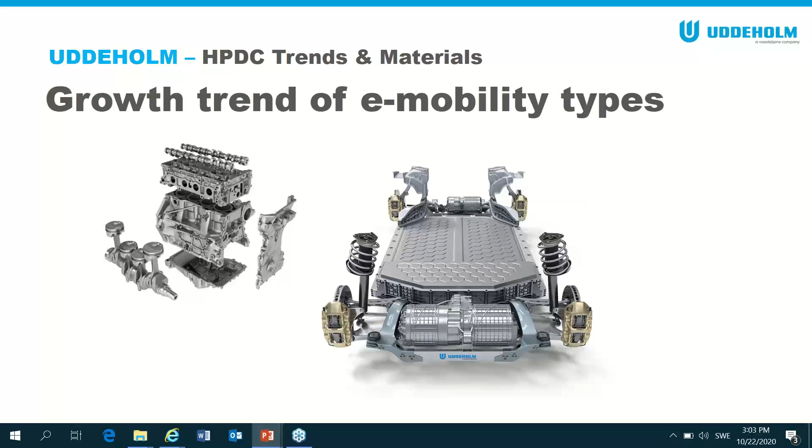So if we look at the chart in front of us, you may have seen something similar. This is our chart, but the information comes from a major OEM of vehicle manufacturing in the world, the top four. And they predict that by 2050, about 45% of all vehicles will be hybrids, and about 40% will be pure electric EV. And the rest will be made up of fuel cell, depending on how big that gets.

But you might notice that the internal combustion engine drops rather rapidly until it completely disappears. But it only disappears as the only form of propulsion of the car. The actual internal combustion engine will continue in the hybrid until eventually hybrids are discontinued as well, and we have a completely electric fleet.

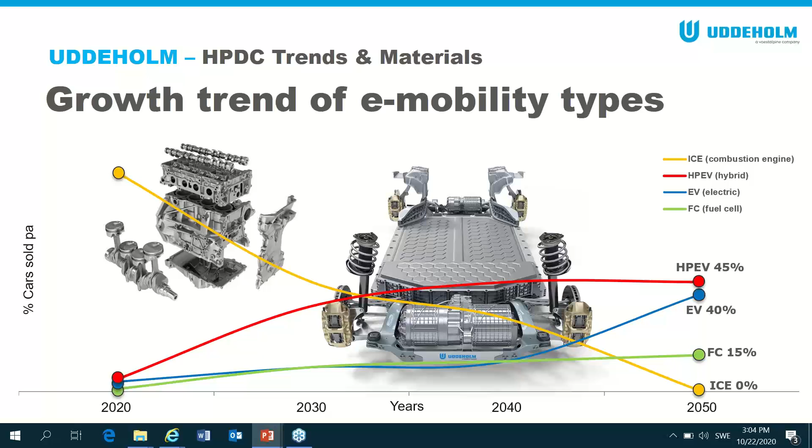But this is really, really good for die casters, for tool makers, for automotive companies in general, because the EV fleet has to now be built up from almost nothing in many countries. It's still a very low, single-digit percentage of cars sold, and the hybrid fleet is growing. So, of course, in the next 20 years, most consumers are going to be under pressure to replace those cars. The sales will inevitably go up. They have to, because laws will be passed on old polluting vehicles. And the benefit for casters and tool makers and tool steel companies like ourselves is our parts are going to go up in casting, not go down.

So that's the benefit of EV and hybrid. So for instance, in an electric vehicle, you will still have structural parts. You will have this in hybrid as well. You're obviously going to have battery packs in both vehicles again, and you're also going to have electric motors in both vehicles. So in a pure EV, you'll probably have 2 motors. You could even end up having 4 motors if each wheel was driven in the future. And all of those will be cast, so it's really, really good news for us.

And if we just look at structural parts, one of the major US manufacturers that I visited a few years ago told me that they think about 30 to 40% growth is possible just in structural tooling on their vehicles. And if you put that into context, I'm very lucky in my job, I get to travel a lot. I visited Ingolstadt last year in Germany to see Audi's R&D center, and they told me there that they think that the average Audi platform will be about 20% high-pressure die-cast structural panels.

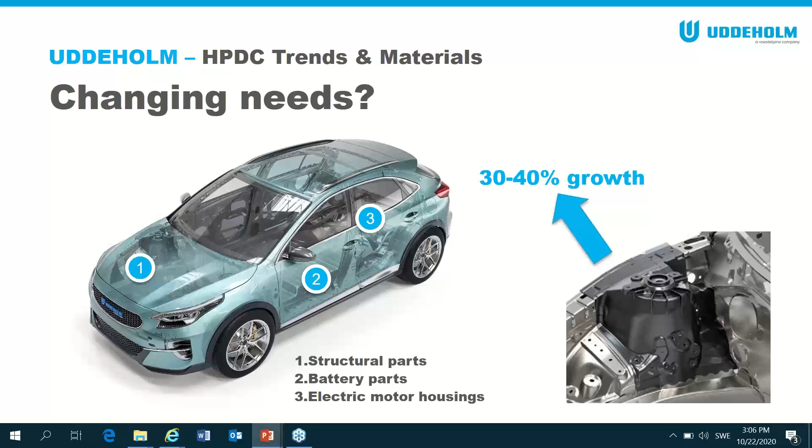And that's just an average. They can go up, they can go down, but you can see this is spreading everywhere. It's even going to filter its way down to small vehicles in the future, so structural is definitely here to stay. If we look at this chart here, so that's structural, let's just talk about batteries for a second. So batteries are interesting as well.

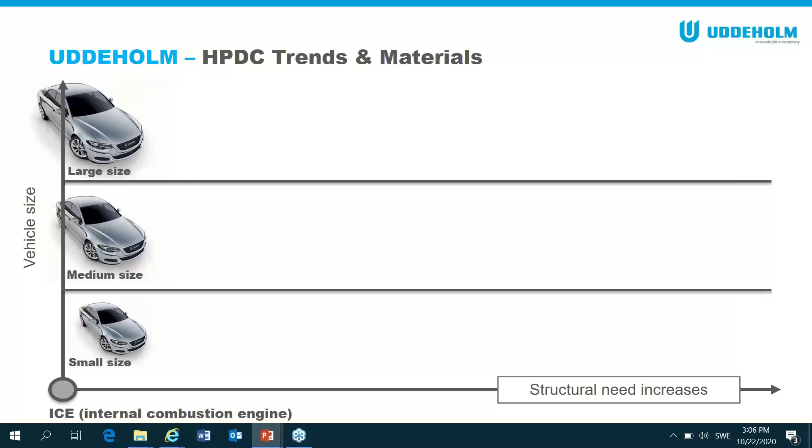If you look at the chart, the horizontal going across is the structural need increasing, and the vertical is the size of the car. And then you obviously have, that's important for weight saving. So that's a point when weight saving becomes important. When you cross that, you need to think about maybe more batteries, lighting in the car and so on.

So if you place the first generation Toyota Prius there, that was a HEV, which is a hybrid electric vehicle. So these cars just need very small electric motors in comparison to today, and quite small battery packs. The battery packs were not structural. They often just had a very limited range, so they weren't even that big. So there, the demands on the tool steel and the casting are actually quite low in comparison to where we are today. But today's a different story.

So if we look at the hybrids, the plug-in hybrids you can get today, they're getting quite complex, very sophisticated cars, very desirable, in fact, with good ranges. So it's getting better and better every year. And in these cars, the battery packs now are reasonably quite large. BMW, Audi, they all do pretty decent sized battery packs on their plug-in hybrids.

And some of the battery packs are load bearing. Some of them need to be sealed in a crash, so they have to have some strength in them so that they don't split when the batteries run the risk, I guess, of catching fire in an accident. So there are restrictions there on the casting, which of course pushes up demand on the tool steel and in the tooling.

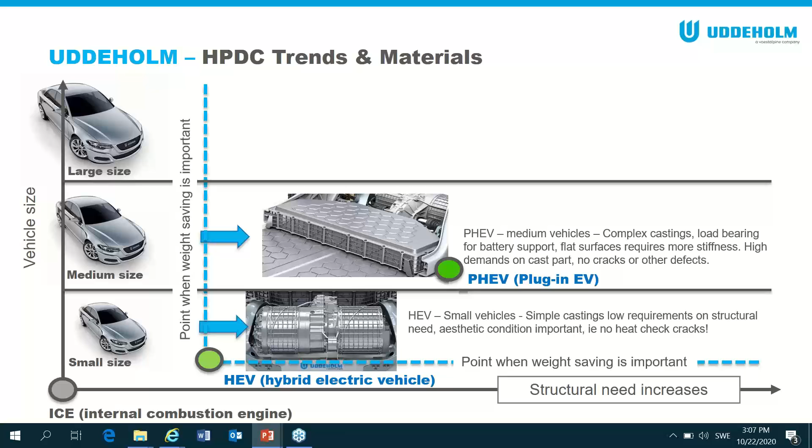And finally, if we go to the biggest electric vehicles that you can get, in the future, this is another trend, and this is where steels like Dievar were developed to where they are today. So battery packs become part of the structure, just like structural tools themselves. So if you took the Porsche Taycan, for example, a big car that I particularly like, I can't afford it, but I like it. The floor pan is actually part of the structure of the car. So the battery pack itself has to have some crash properties, just like a structural panel.

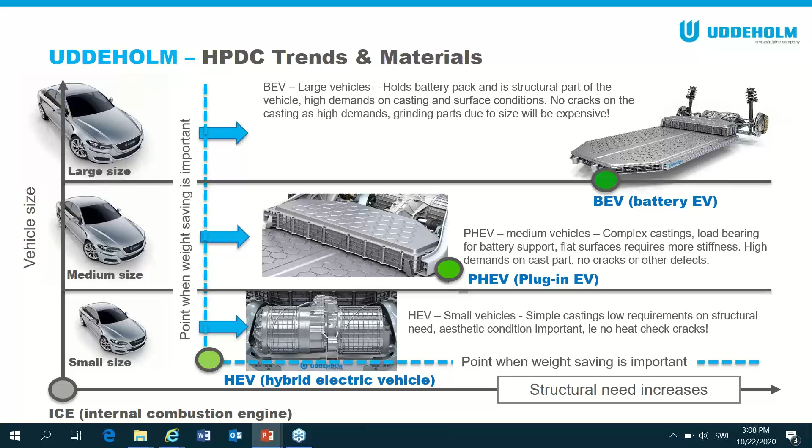So for instance, heat check marks on the critical surfaces wouldn't be allowed. So if you're going to have that, then you obviously need to have a tool steel that can cope with thermal fatigue and delay it as much as possible. And all of this technology is just going to filter its way down through to all the vehicles.

Now, if we go back to where we are today with the internal combustion engine, as I said previously, I'm quite lucky. I get to travel a lot for my job in a normal year before coronavirus. On average, I do anything from 130 to 150 casting visits in a year. That's to everyone from OEMs all the way through to tool makers, the whole process chain. And this is just a snapshot of what I've gleaned over those years of what certain customers tell me.

It's an average of what certain customers get. So if we assume that a clutch cover is being made, they come in all different shapes and sizes, so this is very general. But let's say a clutch cover is made on a 2,000 ton press or less. Then what we're saying here is I've seen customers that claim using H13, H11, 44, 46 Rockwell, around about there, they get anything from 80,000 shots to 150,000 shots.

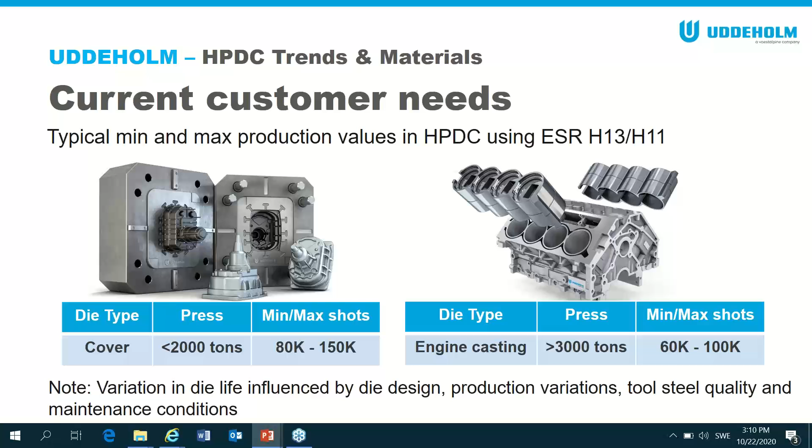And that variation comes down to several points. It's influence of the die design, the production variations, which are a pretty significant role here, the tool steel quality, which of course plays a big part, and also maintenance conditions of the tool, so how it's maintained and so on. And you're going to see that repeated a bit further on.

If we look at structural parts, and how do structural parts compare to that traditional clutch cover engine, internal combustion engine parts, they're actually quite bad. If you look here, the picture on the left is a longitudinal bridge structure, which I saw in Europe. And you can see the heat checking here is pretty bad. This is the thermal fatigue damage that you see on these types of parts. This manufacturer is very good. They have excellent process control, some of the best I've seen in the world. And even they have problems.

So this is an H11 type tool steel. It's 44 Rockwell, plus or minus 1. And you can see 30,000 shots just over. And the part itself has got heavy heat check damage on it as well. And that has to be ground out, actually. So in this manufacturer, they don't actually repair the die. They actually grind the part itself.

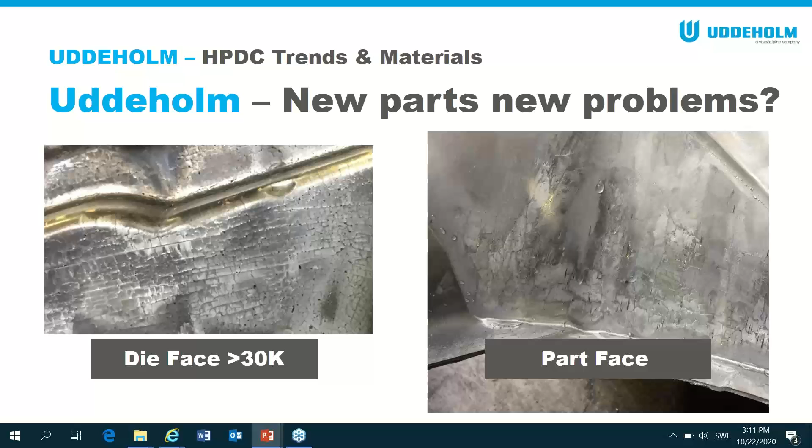And a typical production on the longitudinal bridge for this manufacturer could be anything up to 100,000 parts. But they start having to regrind it from quite early on. So maybe you see here 30, 40,000 parts and they're having to regrind. And it's the same with shock towers as well, just different levels.

So if we look at shock towers, I've seen quite a few of these now in my trips globally. And if you think about a shock tower in itself, they're all different shapes and sizes, but they're quite complex panels. They're quite thick and quite thin in certain areas. Heat checking seems to be the main failure again with these, and it seems to come quite quick on some of them.

And the die life there is just like with all the other stuff, depending on which manufacturer you're at. So again, I visited some customers that run shock towers and they can't even get 30,000 shots. In fact, they really struggle. I visited others where I'd probably say a medium average life is about 60 to 70,000 before major issues.

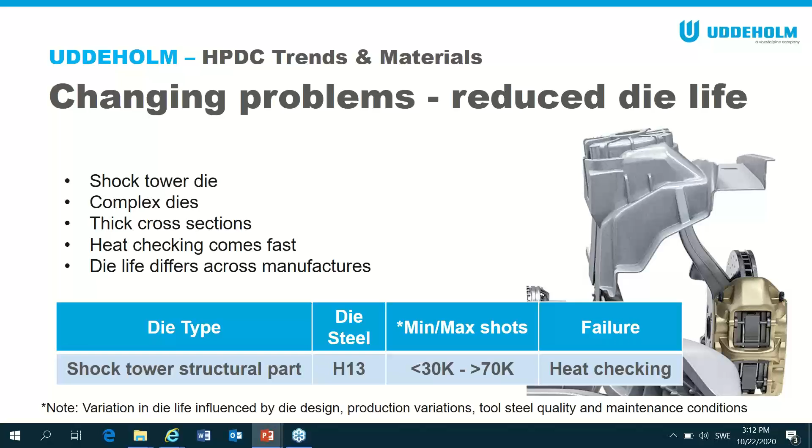There's one market which stands out globally, and that's Germany here. Germany has some of the best die life I've seen when it comes to high pressure die casting. They use an H11 type normally. But again, they're having to regrind the panels quite early on. So the total die life is probably quite good, but there's a constant reworking of the panels, which is of course very expensive. And interestingly, that tends to start around the 40, 50, 60,000 shot area, depending on how bad it is.

So we've seen the trends and an indication of the type of challenges that you're going to face in these certain parts. So let's just look a little bit at typical die failure. There are 4 that I'm going to talk about today. There are obviously a lot more than 4 failures, but these are the main ones you come across. There's corrosion, cavitation, and turbulence, but we won't cover those today. So soldering is a common problem. We work from the top down. Soldering is obviously where the aluminium wants to stick to the core pin.

And this is normally, you find this in areas where the die is getting extremely hot and conformal cooling isn't used or can't be used or isn't used at present. Then we come to the big one, so that's heat checking, thermal fatigue. Thermal fatigue is a cyclic problem. It's basically the extremes of the heat in the process and the coldest part and the gap in between the two. It's called the delta T, and that needs to be as close as possible to delay heat checking for as long as possible. And that's hard to do, and we'll go into that a little bit now.

And then we have gross cracking. Gross cracking, of course, is a failure that everybody wants to avoid. No one wants a broken die. Unfortunately, I've seen several in my travels. It is still quite rare, but it does happen often enough to be a concern for most people. And gross cracking really is where you've overloaded the tool. It can be either process related or it can be mechanically related to something that's gone on in the process itself, press misalignment, and so on, sharp radiuses.

And then we move on to erosion. So erosion is a hot wear, mechanical wear. It can also be chemical as well. It can be the type of aluminium that you're running, if it's high silicon. The velocity of the melt has a lot to do with this, how fast your aluminium is coming into the die. And really coatings or surface treatments are the long-term answer. And we've got some great examples to show you.

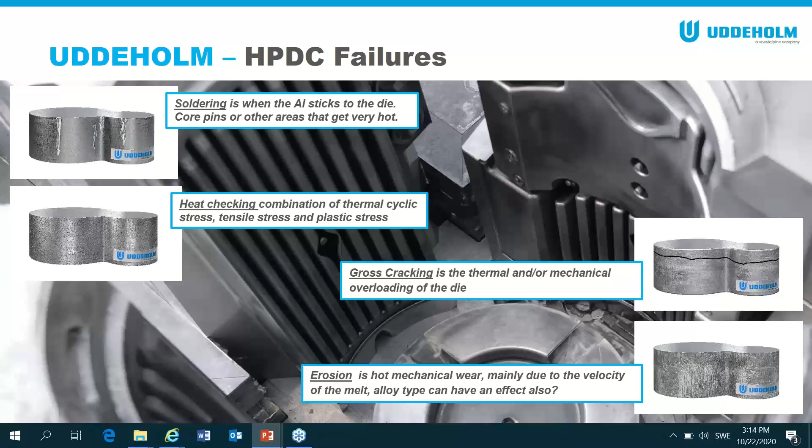So very quickly, just one page, we're going to cover each failure because we haven't got time to go into details. We could talk 2 hours, 4 hours about heat checking, for example. So heat checking, we'll just talk about how to avoid heat checking. What do you do to avoid it? As I said before, it's all about controlling the delta T, which is this variation in temperature from the highest to the lowest. That's the critical thing that you need to control. And you can go about that by various different things.

So the injection speeds is one. So try to avoid excessive injection speeds, and I'll give you a rough rule of thumb in a second when we talk about erosion. Try to avoid excessive spraying. That kills dies, absolutely kills dies. I think at Euroguss a few years ago, a company called IV4 did a talk. They submitted a paper about spraying, and they said, I think it was something like 90% of all failure is down to spraying. It was quite critical, but spraying has a big influence, absolutely. Then think about the design, think about the heat treatment, and of course the maintenance. There's so many things that can influence heat checking.

The tool steel, so if you look at demands from the material, which is what I'm here to talk to you about today, from a material point of view, we have to give the customer a material which has excellent hot strength, it has to have high ductility and toughness, and it has to have high creep strength. And what's interesting is if you don't have any of those three properties, then you're not going to have the performance in the material that you need. And if you look at the picture, you can see that's the same die that we saw before with quite excessive heat checking. And you can see there's actually breakout on some of the surfaces there of the tool steel.

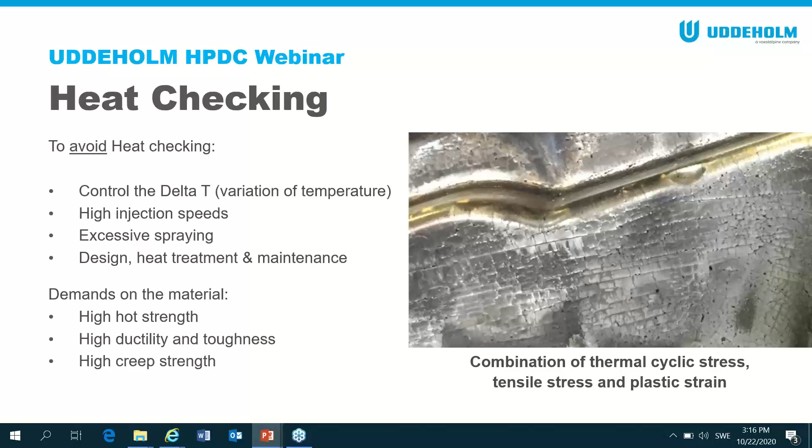You also have to think about preheating. It might interest you to know that if you preheat even an H13 type material, you can double, triple the toughness in it in production. So preheating is pretty significant. And Dievar is much, much tougher than an H13. So you can see why Dievar is so popular. Again, control your cooling. If your cooling's all over the place, then you're going to reduce the toughness because it gets cooler, like I just explained with the preheating.

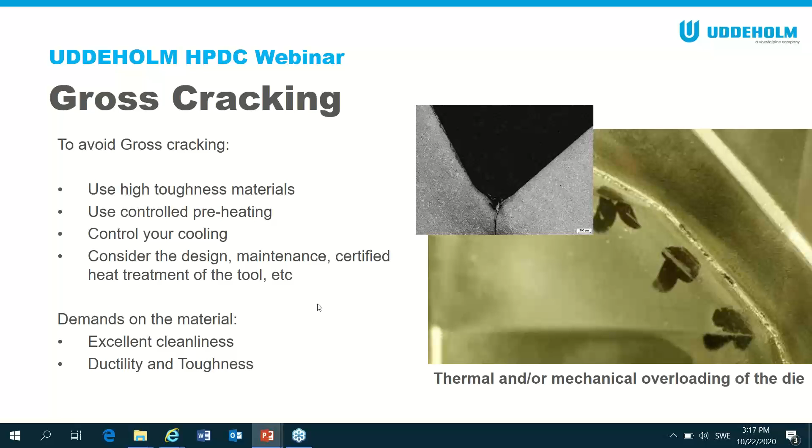If the design says that you have to have this and you have good process control and everything else is really good and you just narrow it down to the tool steel's abilities to have good toughness, then we can recommend something like Dievar, which is exactly what we did with this customer after they had this problem. So that's what we need from our material. Material demands there on the bottom left, excellent cleanliness. Dievar, for instance, is 100% pressurized ESR. We only use the latest furnaces now to make Dievar, and good toughness and ductility.

So you have to consider the design when erosion is present, of course. If you've got a very, very thin gate with a lot of velocity coming through it, then you're definitely going to get washout erosion damage. So you have to consider the velocity and how much damage that's going to do. We tend to say if it's a non-vacuum assist die, 30 to 50 meters per second, that rough area. And if it's a vacuum die, then maybe 15 to 30 meters per second. Those are rough rules of thumb. It goes up and down, and different manufacturers have their own standards, but that tends to be what we say works quite well. You really, however, have to use a surface treatment here.

And of course, the aluminum matters as well. It's high silicon, and that's obviously going to affect what's going on there with the washout. So you have to protect the tool steel with a coating or a surface treatment. So here you've got the choice of nitriding or obviously Eifeler do a very good coating called Tigral that is quite successful in lots of dies. But that coating and nitriding has to be able to stay on the material. So you still need a material underneath it which has got very good high tempering resistance and hot yield strength. Because without that, the coating is not going to stay there.

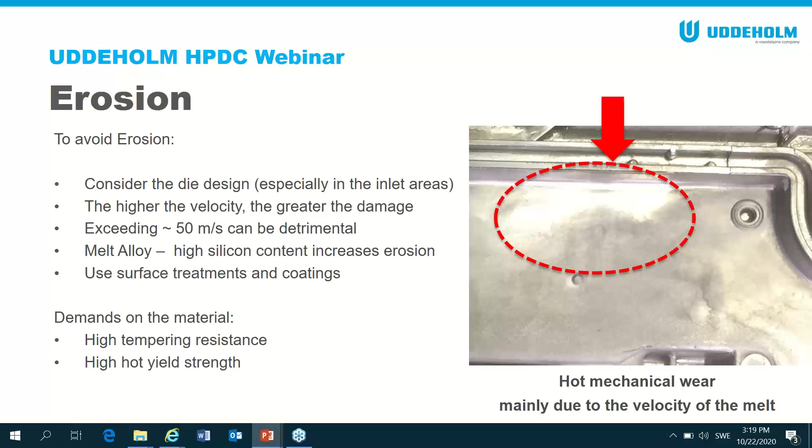And then finally, we move on to soldering. This is quite interesting. This is an investigation I did about 3.5 years ago. This is a big H11 tool from Germany. And you can see here the tower all by itself. Look at that tower, completely isolated. What's interesting is the main gate is right in front of it. So you've got hot aluminium coming straight at that tower. Of course, we're getting soldering on the surface, which is what you can see. And you've got to try and minimize the contact between the melt and the tool steel because the melt wants to bond with the tool steel, which is what soldering is.

So you need to put a protective layer there. So that normally can be a coating, it can be nitriding, or even good lubrication counts as well, of course. You want to try to avoid too high die temperature. We've got an extreme example here because this tower's got so hot, it's making it worse. And unfortunately, there's no conformal cooling in this tower. And that's where we lead on to really with good thermal regulation. If you use AM on parts like this that suffer this sort of problem, you can really improve your production, because then this problem area doesn't become such a problem anymore. So AM really is the future.

So the demands on the tool steel, at least for soldering, are excellent hot properties, excellent ductility and toughness for complex shapes. And here really we have two materials that you could use today.

There's a steel called QRO90HT, which is a pre-hardened core pin material. Its hardness is 37 to 41 Rockwell. And that might seem like a low hardness, but it really isn't. Lots and lots of customers use it globally, including some major OEMs directly in their engine parts. And it works really well.

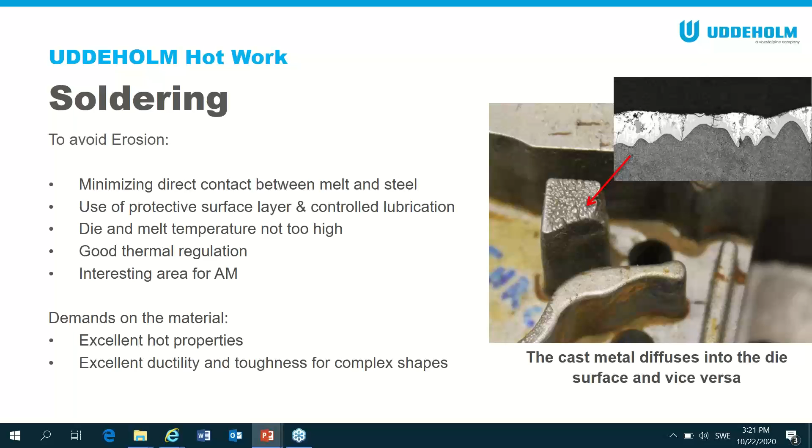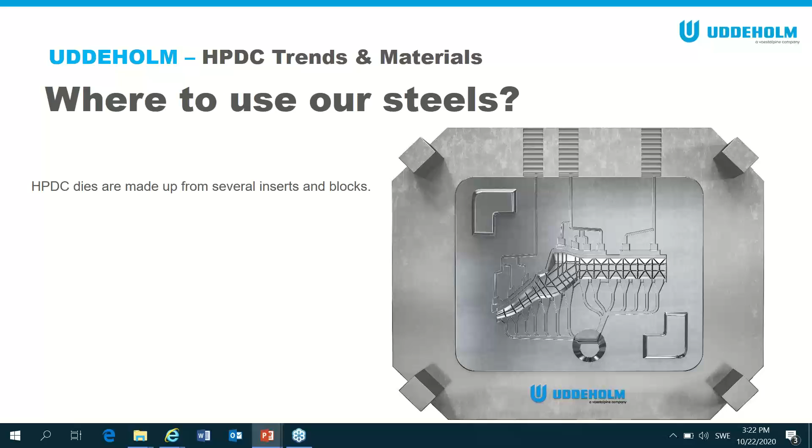So now we're going to go on to some tool steel solutions from Uddeholm. If we take the longitudinal bridge tool, which I talked about earlier on, we've now got quite a few customers globally for this type of part. So I can say with confidence that the main core cavity would be Dievar, because you want to delay heat checking and you also want a really tough material. Don't forget there's lots of cooling channels in these dies. That's a major weak point. So you want a tough material as well. Then Dievar works really well.

And hopefully in the next couple of months, we may even have some case studies. So gates and sprue areas, you can use whatever you want there, depending on the failure, to be honest. So you can use QRO90, maybe Unimax, maybe Dievar. It depends on what failure you're trying to solve. But again, additive manufacturing has got a big future here for the sprue and biscuit areas where you want to control the temperature of the steel.

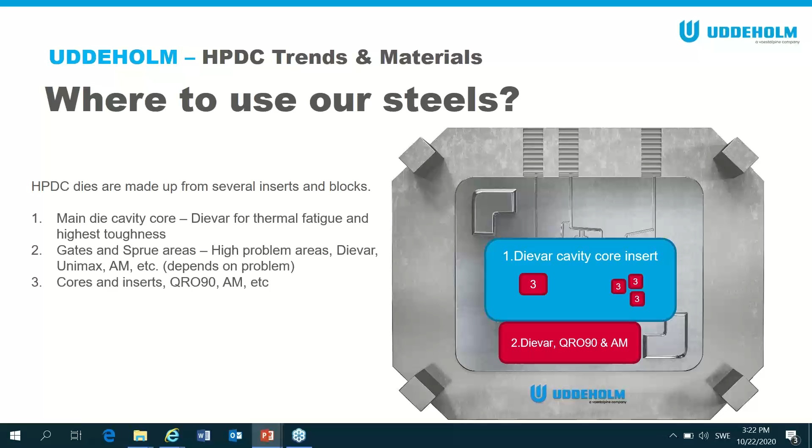The core pins, we've already covered really. So QRO90 and additive. There are also other steels like Unimax, which is very good for erosion resistance because it's high hardness. We'll cover those steels in a second. The main body insert could be anything from Dievar to H13. We actually do have customers in China where the whole die is made from Dievar. And that's where the Dievar upgrade came from originally.

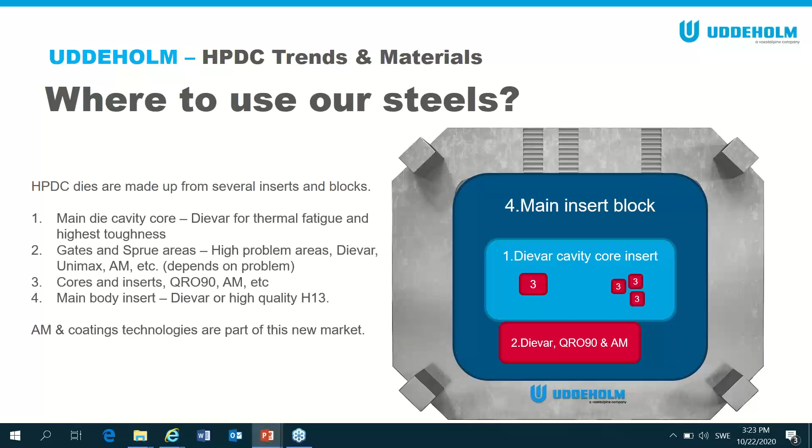So Dievar was upgraded about 2 years ago now, and it comes from structural tooling. So we can actually say with confidence that Dievar was created for structural dies, because that's why it was upgraded. It comes from a project from a major German manufacturer that was making a big car in China, and they already specified Dievar and wanted to use it in a bigger block. So we had to develop a new process to make it. We had to develop many new things, and we effectively created a whole new quality level for Dievar by doing that, which I'll explain in a second.

So let's talk about Dievar in a little bit more detail. If you haven't heard of this material, it's very, very famous. It's probably about 20 years old now. Like I said, it was upgraded just 2 years ago. You will now find it as the second highest rated material in NADCA, but the other material is a modified H11, which will not delay heat checking like Dievar does. So the beauty with Dievar is you get that extreme toughness, but you also get the ability to delay heat checking as well. You get very, very good temper back resistance with this steel.

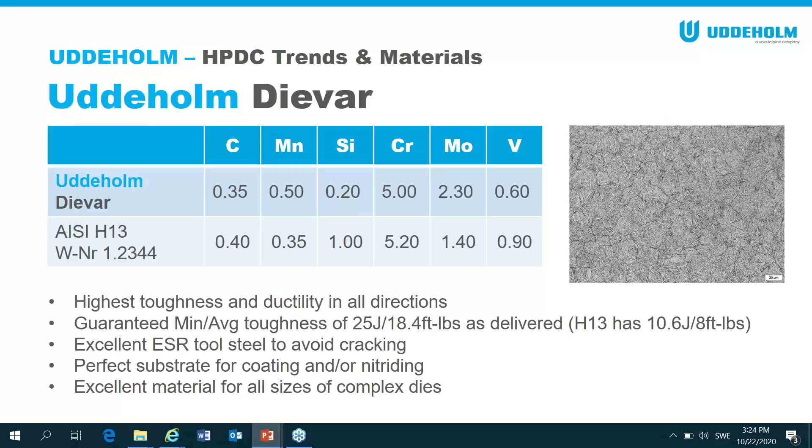Like I said, it's an excellent ESR tool steel. It's actually all pressurized ESR furnaces now that this steel is made on, which would explain why it's so clean when you test it. It's very, very suitable for coatings and nitriding, and it's an excellent material for all complex dies, which is why it was selected for structural tooling. And that brings us back to April last year. The upgrade was actually in 2018 in the mill, but we launched it in April.

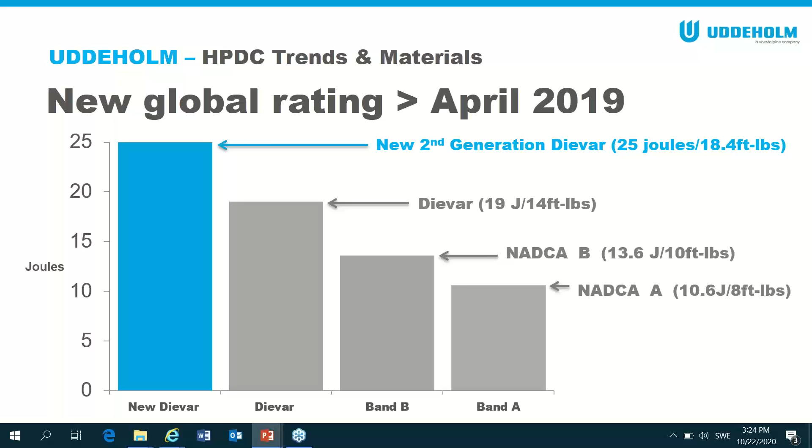You can see band A and band B for NADCA. So you've got B superior there, and then you've got the old Dievar rated at 14 foot-pounds, 19 joules. And obviously it's now upgraded to 25 joules and 18.4 foot-pounds. That's the minimum average guarantee from us, the manufacturer, to you, the customer, on the soft annealed delivered material. Now in NADCA you have to get 80% of the capability of the material. So in heat treatment that would be 20 joules.

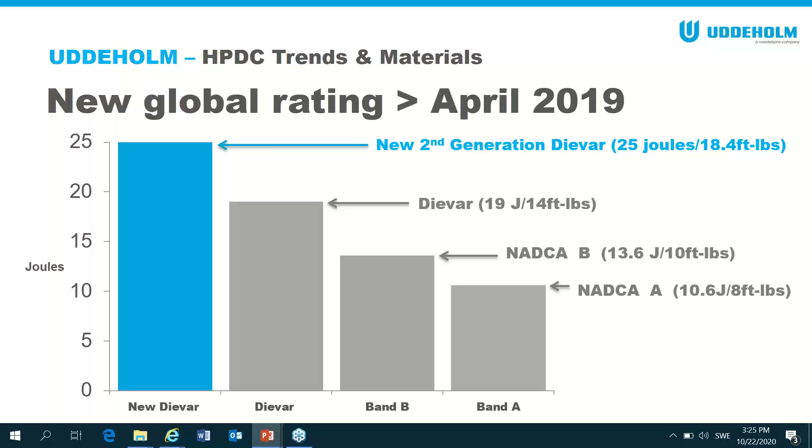I think it's just over 14 foot-pounds. The properties and the chemistry of the material then, so let's just talk about those three properties about delaying heat checking that I mentioned before. You have to have temper resistance. And here we have the effect of 600 degrees C over time on Dievar and Orvar Supreme. So this is our Orvar Supreme here, not competitor H13.

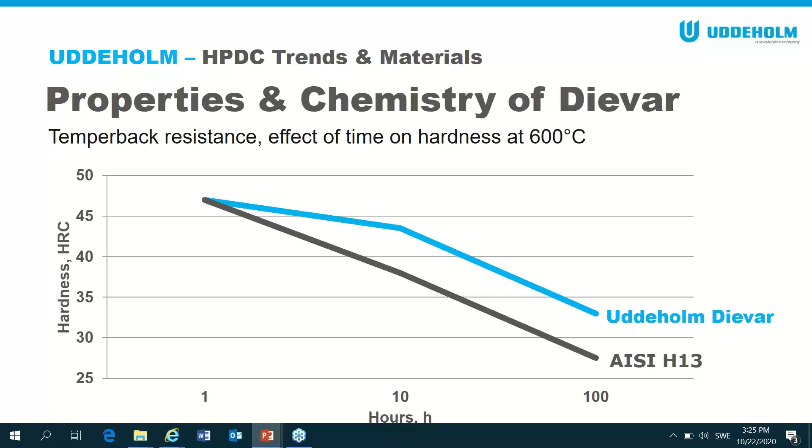So both materials start at 47 Rockwell, and you can see straight away Dievar shoots off by itself. So when you get to 10 hours at constant temperature, Dievar has gone from 47 to about 43, 44 Rockwell, and Orvar Supreme's dropped down to about 37. Okay, and then it stays parallel all the way. So that's one of the reasons why Dievar gives so much better performance in heat checking.

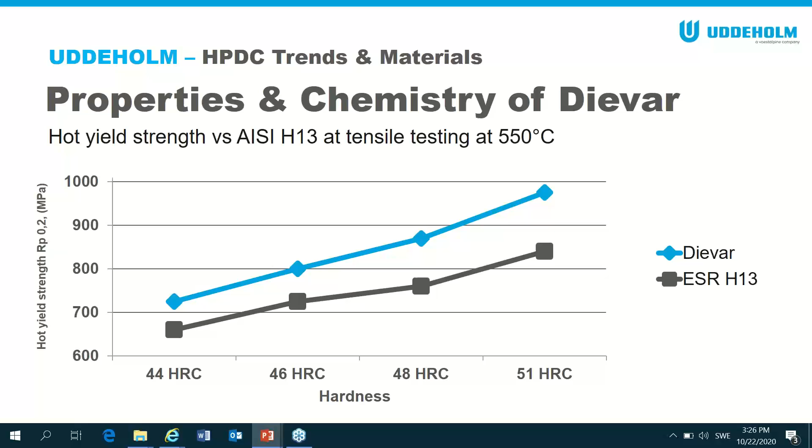Another property you need is hot yield strength, which is what I mentioned earlier. So this is a tensile test at 550 degrees C. And you can see at 51 Rockwell there that Orvar Supreme has about 830 megapascal, and Dievar has just under 1,000, about 970, 980. So again, big difference in hot yield strength.

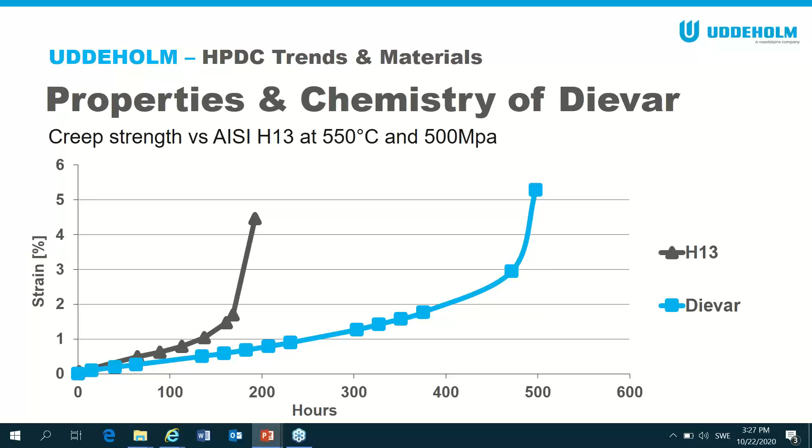This is one of the reasons why it's used in extrusion, for example, for heat sink dies, because Dievar doesn't flex so much over time and temperature. So in Orvar, it starts to go around about 150 hours. You can see there the curve. And in Dievar, the same level is about 250. And actually, it doesn't really start to move until about 400 hours. So it's a significant difference against Orvar.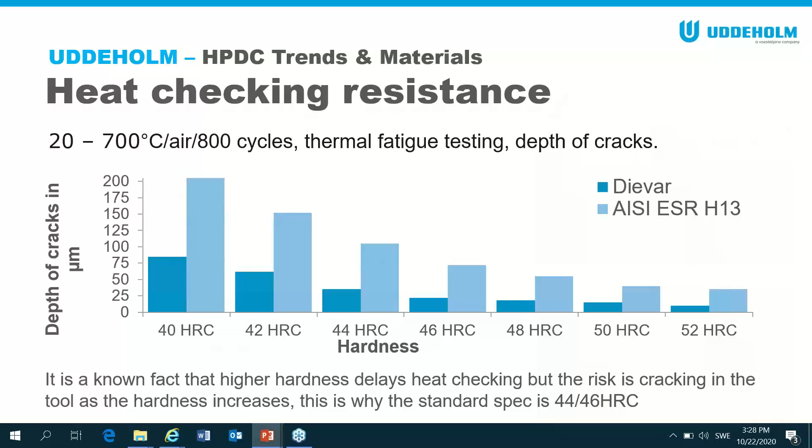I'll answer that question in a second. If we just look at a case study to prove a point, because there's been lots of laboratory examples, this is a real life case. So here we have a 4-cavity die, left and right hand. And we have 2 cavities made of Orvar, 2 cavities made of Dievar, both the same hardness, and they've both done the same amount of production.

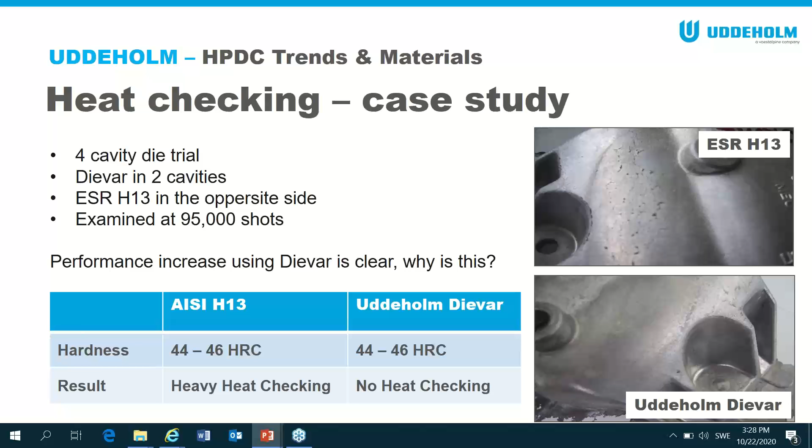And you see there that Dievar has no heat checking at all on its surface, on the casting, and Orvar, a lot of heat checking. It's a good material, but you see there's much, much more heat checking than with Dievar. So a great example there of how two materials perform differently.

If we take that to a customer that's more recent, this is confidential, so I can't show you any pictures, but I can tell you about it. So this is a customer in China that I visited where they actually specify Dievar. This customer makes large castings. They actually have Buehler presses going all the way up. They tend to start from around about 2,500 tons and upwards.

On all their presses from 3,000 tons and over, they actually insist on Dievar for everything. Everything's Dievar, because they know it's so much better at crack resistance than an H13. And what they do there, this is a battery for a bus. This is a bus battery. So the battery, the part itself is probably about a meter, just over a meter long, about half a meter wide, about, let's say, 10 inches deep.

And this box itself gets about 80 to 100,000 shots in Dievar. And if it was made in H13, they were kind enough to tell me what they would expect, and they would expect 40 to 60,000 shots. And the reason they use Dievar is they can guarantee to the customer 80,000 shots, which is what they need to do. But often it will run 100,000. So a great example of what Dievar can do.

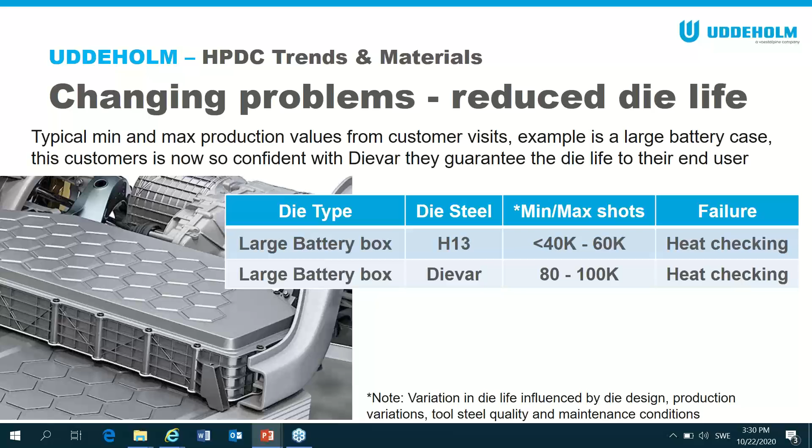Again, some more examples from my travels. So the auto gearbox here is from China. This is near Shanghai, and it's an H13, 44-46, and they run Dievar as well, 44-46. They do first weld repair, so this is talking about when the die first is repairing. The first weld repair at 20,000 shots, and with Dievar it's 45,000.

So you can see there a big improvement in the maintenance life of the dies as well, not just total life. And they see there that the H13 would go on to do 50,000 shots and the Dievar well over 80,000. So again, we see that figure in China of well over 80,000 shots compared to 50, 60,000 for an H13. In North America, the clutch cover is an example from North America.

And here you can see a die which started in H13 at 42-44 Rockwell. They get a very different result. Obviously, the die is more challenging, so the life is less, but the performance increase is the same. It's a doubling. So they get 5,000 shots with an H13, and they have to weld repair. But with Dievar, at the same hardness, they get 10,000. Again, completely shows the difference between Dievar and H13.

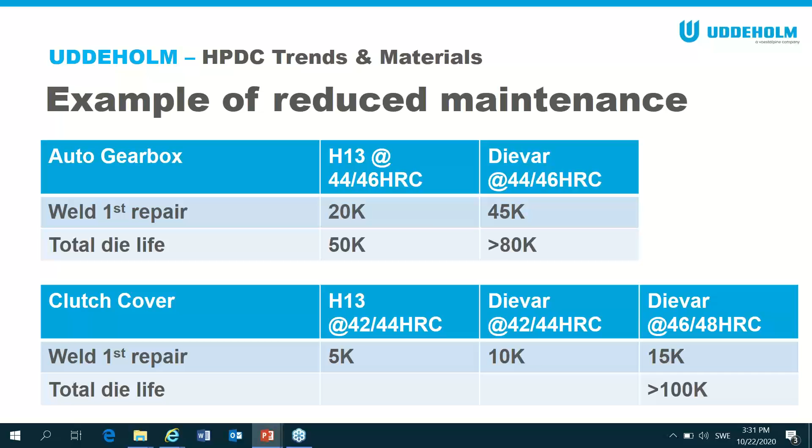But then they used their own initiative. They went up from 46 to 48 Rockwell, and they got 15,000 shots. So you see a practical example of that higher hardness giving less heat checking as you go along. And they get well over 100,000 shots on that die. So I said I would give you an example of this higher hardness and what it meant.

I'm allowed to name drop Corey here from Chrysler because I asked his permission whenever I do talks about this, because this was his idea. So I went to see Corey a few years ago, and he likes our materials. But he said to me at the time, we didn't relaunch Dievar at this point, and I was trying to say to him, you know, it's really good toughness, and it's much better than it was in the past.

And he said, I believe you, Richard, but what happens in a real die when we go over the 46 threshold? And he said, 8 foot-pounds is kind of the minimum I think I need. What would you get in Dievar as you go up in hardness, and how does it compare to Orvar Supreme? So that's exactly what we did. So you see here we took stock cross sections, so bigger cross sections at the mill. We heat treated them just to see what we would get.

And you see there at 48 Rockwell in Dievar we've got 17.7 foot-pounds, and in Orvar Supreme we've got 10 foot-pounds. So a big difference between the two materials, and this just carries on as you go up higher. Now remember, the minimum level that he talked about was 8 foot-pounds. And we see here at 52, we've reached the limit now with Orvar Supreme. So you see you've got 7.7 foot-pounds there. But in Dievar, you've got 11 foot-pounds, 15 joules compared to 10.5.

So it's amazing. And of course, we're not about to start recommending you go at 52 Rockwell on the dies. It wasn't for that reason we did this either. It was to show the potential of the material itself.

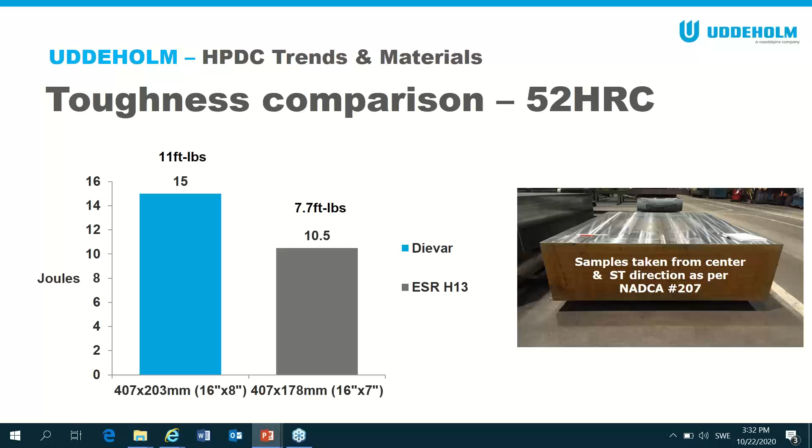Okay, how much tougher is it than H13? How did we do this? Well, as I said, we had a project with a major German car maker about structural parts. And in 2010, they came to us with this. And what you can see in front of you is 2 sizes from our stock standard range.

So we've got 20-inch by 12-inch and 24-inch by 20-inch. And what happened is, by making these really big blocks for this customer, we had to improve the quality. But by doing that, we had to look at processes throughout the entire mill. So we actually improved the whole product by doing this, not just these big blocks we made. And this shows you what happened.

So these are standard sizes. So if we look at the 20-inch by 12, in 2010, we were averaging around about 18 foot-pounds on that size. By the end of the project in 2018, we were averaging 21.4. And it's the same story for the 24-inch by 20-inch. What's really interesting is if you look at the very bottom scale there, that's the highest single result we achieved that year on all sizes.

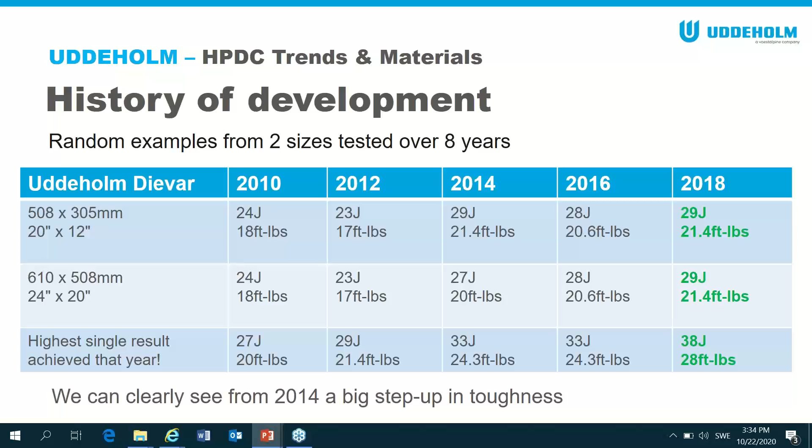So all the Dievar that we made, the highest result we got in 2010 was 20 foot-pounds. By the time this project finished in 2018, that had risen to 28 foot-pounds. It was the highest that we did that year. And I can tell you with confidence, because of what we've done here, those figures are even higher now. So the Dievar product is fantastic.

One of the reasons we've done that is investment in new equipment. So what you can see is a picture of 6 new automated heat treatment furnaces. This is for manufacturing soft annealed tool steel. And of course, this is taking human error out of the equation completely. So now we get a very, very consistent material. And of course, this benefits all of the products in our factory, not just Dievar.

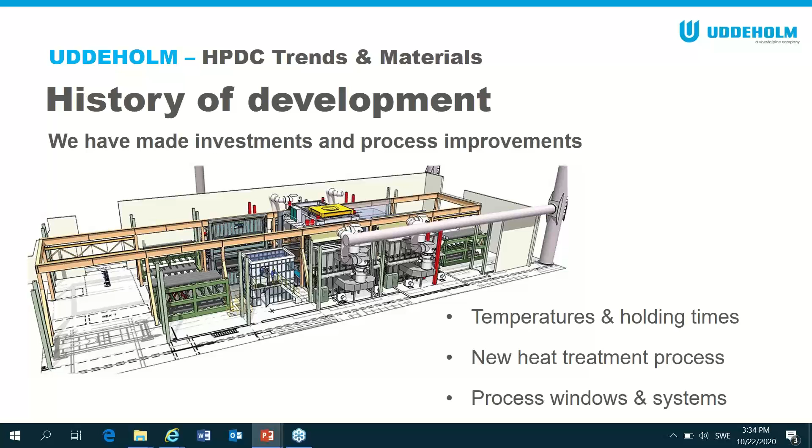But with Dievar, we also looked at new heat treatment. We looked at new holding time temperatures, new process windows. Everything was looked at. And that's why we got this. So we're getting to the end of the presentation now. So we just look how this compares to some of our rival materials. Often I hear that a 2367 is superior to Dievar for toughness. Blatantly not true.

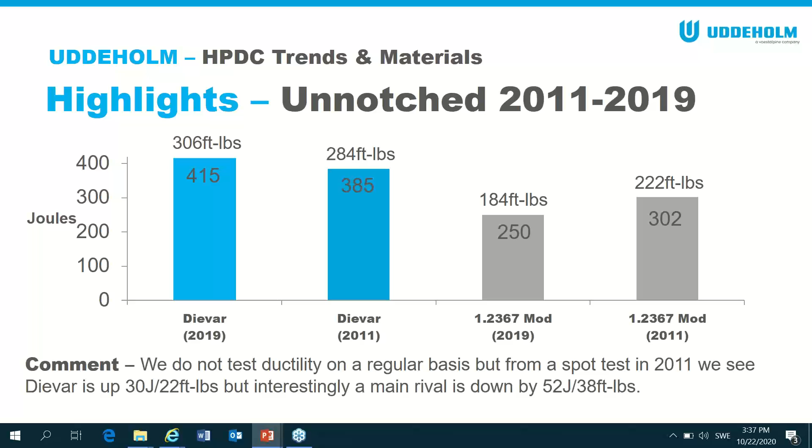And if you think, well, where does that sit then, Richard, if you ask me? Well, actually look at the 2367. So we've got here 201 foot-pounds, and in 2367 we've got 184, 222. So Unimax is probably somewhere in the middle of that, depending on the quality of the 2367. It's an excellent tool steel for delaying wear, erosion, so you can use it in gate areas, runners, if you can insert it. You can also use it for whole cavities if they're not too big. In the Asian market, Unimax is actually quite successful for telephone castings. It's very popular there. It's a very, very good material.

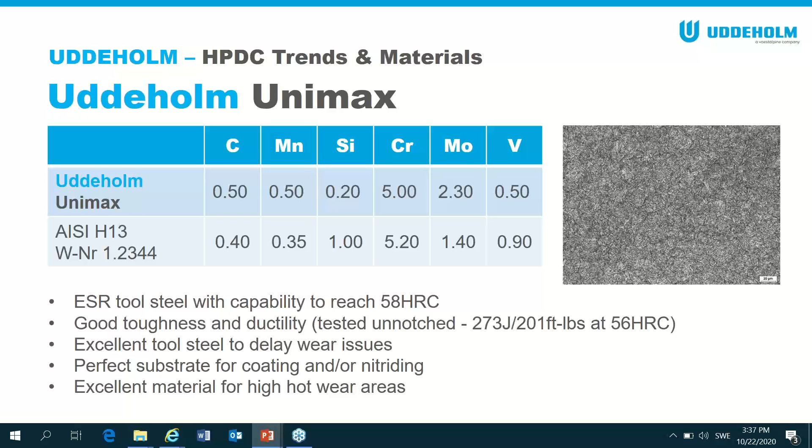So let me come on to QRO90. QRO90 is a good material. It's been about 30 years in production, but it's the best temper back resistance of any tool steel we make. It's truly excellent. And it's that good that actually in certain cases where we've used Unimax and QRO90 together, if you think Unimax is at 58 and QRO is at 52, eventually with time and temperature the two will actually cross over. So in the long run, QRO90 has better temper back resistance even than Unimax.

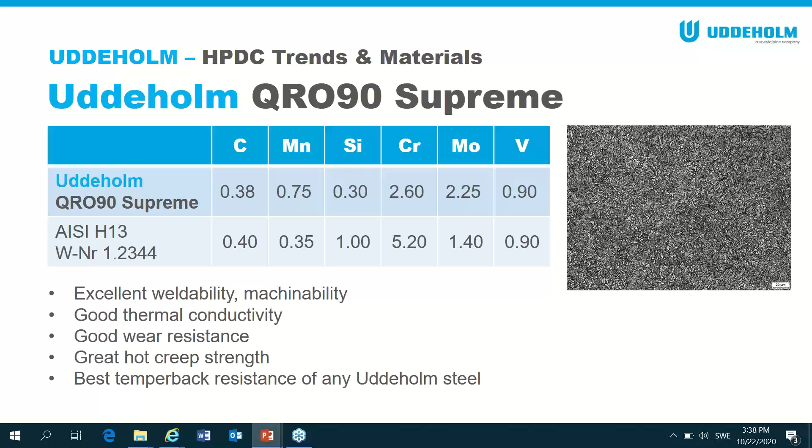But of course, that's temper back resistance. Unimax would be better resistance. But this material is brilliant. So very good for coring. Very good material for coring.

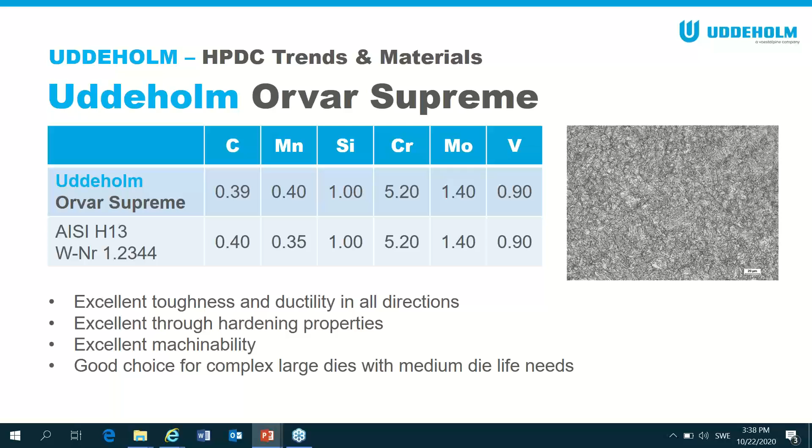Orvar Supreme, what can I say about Orvar? It's a very, very consistent, high quality H13. And I would argue it's the best in the world as a stock standard off the shelf. Very consistent. And don't forget, this material benefits from all the process improvements we've made here in general investments, heat treatment, and so on. So if you look at your Charpy V values on your cert that you get for Orvar Supreme, you're most likely going to see figures well over 20. Very, very good material. And the cleanliness is excellent as well.

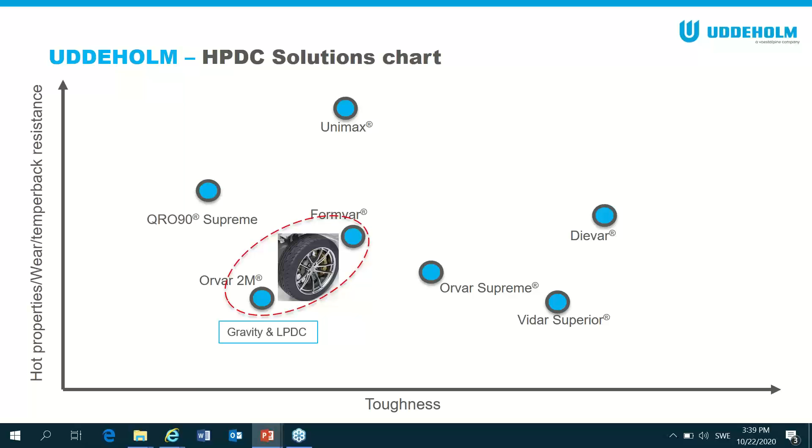So how do we place these materials? Well, there's two there that I haven't mentioned, but we're focusing mainly on high pressure. I put them here just in case there are some low pressure or gravity casters listening. So we do Orvar 2M, which is an H13 type material, and we do Formvar. Now, Formvar is a non-ESR version of Dievar, and it doesn't have the same processes as Dievar, so it's not as tough. But it benefits from all of the hot properties that Dievar's got. So high hot yield strength, temper back resistance, and so on.

If, however, we're talking about main dies, so this would be medium to good sized tools, but where long life isn't absolutely critical, then of course we've got Orvar Supreme. Orvar would be the die for, say, over 60,000 to 150,000 shots, depending on the size and application. And for European listeners, we've got Vidar Superior, which is an H11 modified, which is very, very tough, but it doesn't quite have the hot properties of an H13. So hence it's rated just slightly above.

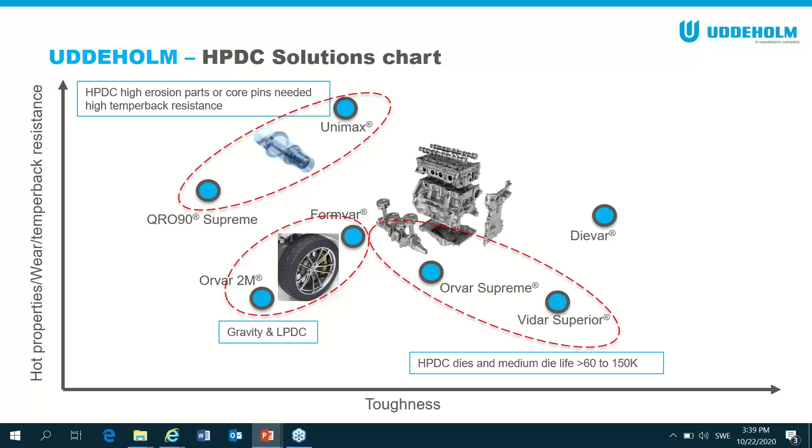If we look at Unimax and QRO90, you can distinguish the two. You can say Unimax is for high erosion, high wear applications, and QRO90 for coring. Very, very good for coring, particularly if you use the pre-hardened version, QRO90 HT.

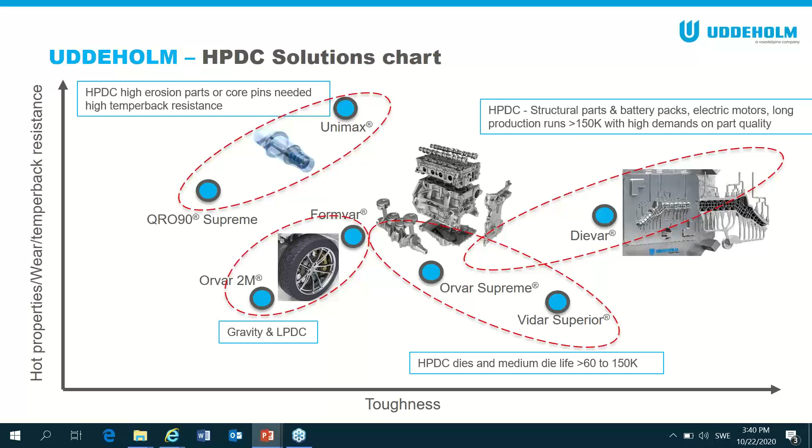And then finally we come to Dievar. So Dievar is the do anything material in effect. For instance, it can be for dies for 60,000 shots and higher if it's structural, because there's a much lower die load. It can also be for long running tools if they're medium size. I showed you the example of the one that did 150,000 shots in the heatsink and went on to do 250,000 with the coating on it. So that's where our materials would sit. But if you want more detailed advice, talk to any of our technical staff. We can help you with that.